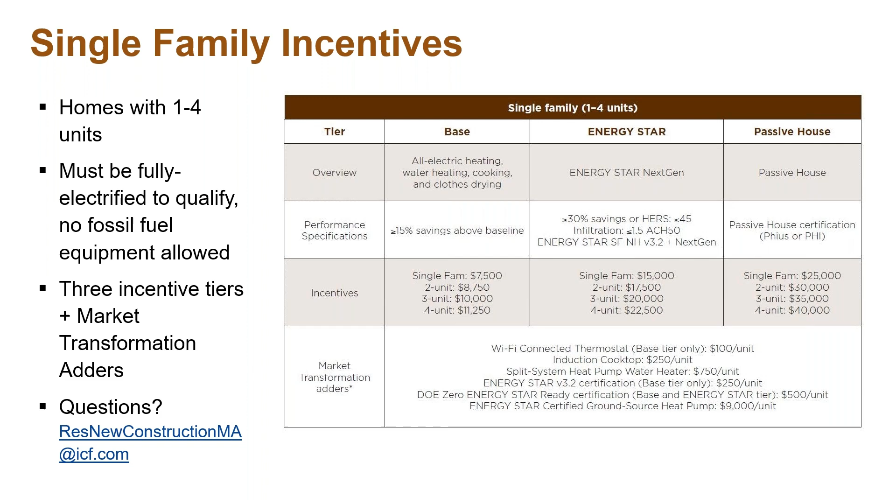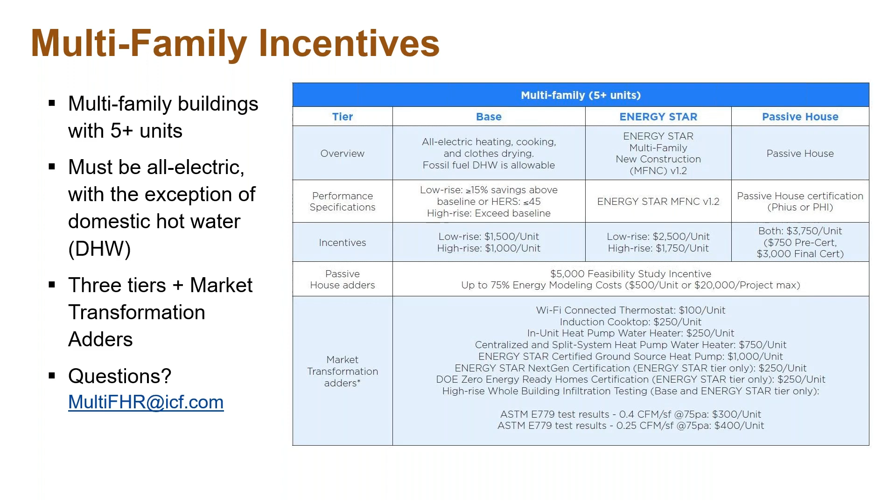How you doing, Keegan? Thanks so much. So good afternoon, everybody. We're going to be talking about the Newton all-electric case study today. Thank you all for joining us.

Our panelists today are Nick Falkoff from Auburndale Builders, Richard Lowe from Kaplan Thompson Architects, and Mike Browne from Advanced Building Analysis. These 3 people were the primary builder, architect, and HERS rater for this project, and we definitely thank them all for their time today and for sharing their experiences on this unique build.

For the case study today, we're going to go through a little bit of everything from inside to outside and everything in between. We're going to end with the key lessons and takeaways before we segue into a brief question and answer period at the end. And just another reminder, there's a Q&A box in GoToMeeting that you can type your questions in, and we'll get to as many as we can at the end.

So let's start from the beginning. I'd like to start with Richard. We're going to set the stage a little bit here about the project. So Richard, can you give us a little bit of the background and the genesis for this project? Yes, thanks, Jamie.

The clients came to us largely, I think, because Kaplan Thompson Architects has a lot of experience with passive house projects—single family, multifamily, and schools. And this site here that they had found had some tremendous opportunities. It's got this fantastic view of the Charles River. The existing house sits on a knoll overlooking the water, and they wanted a low energy, high performance passive house home. So we were delighted to be able to help them with that.

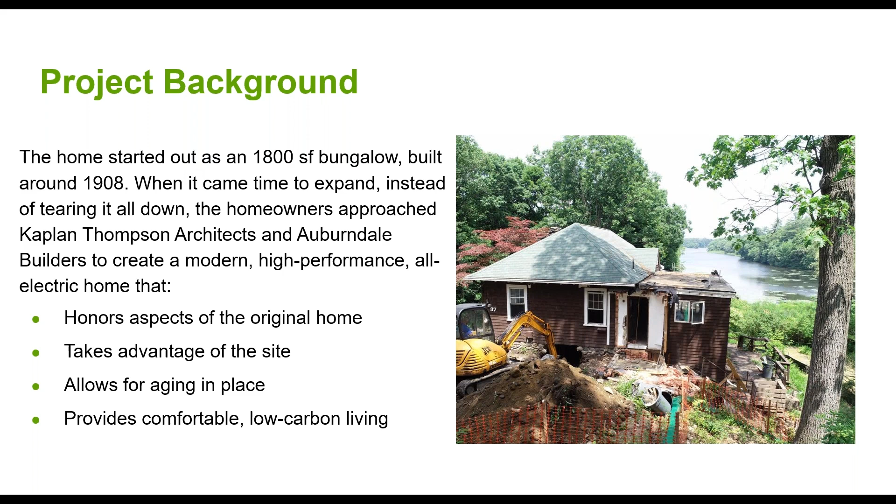On this slide, we have some of the key project attributes. What did the homeowners express to you as being most important when you set out to start construction? Richard had done a lot of work in pre-construction with the clients on the design, and really did a nice job balancing things.

We had to keep the existing chimney and structure. We had the views that the clients were trying to emphasize to the river, and we tried to balance performance with aesthetics—maximizing the views where we wanted them, with trade-offs on how much insulation and how thick the walls could be based on not trying to lose floor space. I think Richard did a really nice job balancing the aesthetics and performance.

The building is super insulated, with the insulation on the exterior of the building, so that doesn't cut into the footprint. We went outside of the old plane of the sheathing from the old house, and air sealed from the outside.

The building has cold climate air source heat pumps that are super energy efficient, so once we had this great envelope, we could heat it all-electric, which we'll get to in more detail. Our team has done a number of passive house projects and net zero projects.

So we just worked with Richard and the clients in terms of phasing the work. You'll see slides of working around the existing structure—it's a sloped site, we're working on the river, and we had to really break things up into a lot of steps. Now that the clients have moved in, we'll be doing a lot of monitoring of the house.

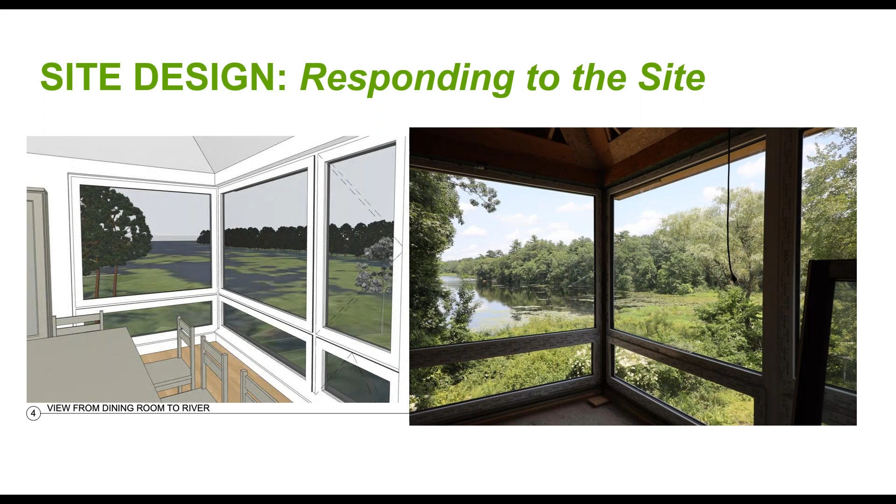The 20-foot drop in the site down to the lowest part of the grade, where there's enough space to put a garage, would make it extremely difficult to provide interior access between the garage and the house. That would also put the new structure on the river side of the existing house, which wasn't possible because of the setbacks given the proximity to the water. There are other setbacks from the road to be mindful of as well. The only place we could put the garage was underground.

Alongside the existing basement, that became the main part of the design, how to accommodate that program. So we now have 2 occupied floors. The living spaces and main bedroom spaces are on the upper floor. Secondary spaces, the mechanical room, street access, entry door, and the garage are all on the lower floor.

That was a big part of the challenge. The views are all to the north and to the east. That's where we put the glazing, because that met the program and the design requirements for the house.

There's a neighboring house to the south of this property, so there are privacy concerns if we put a lot of south-facing glazing there. In addition to that, the property and the neighboring property all have a large number of very tall trees. So even though we might be able to put windows facing south, the shading from the existing trees would limit any solar gain we have there.

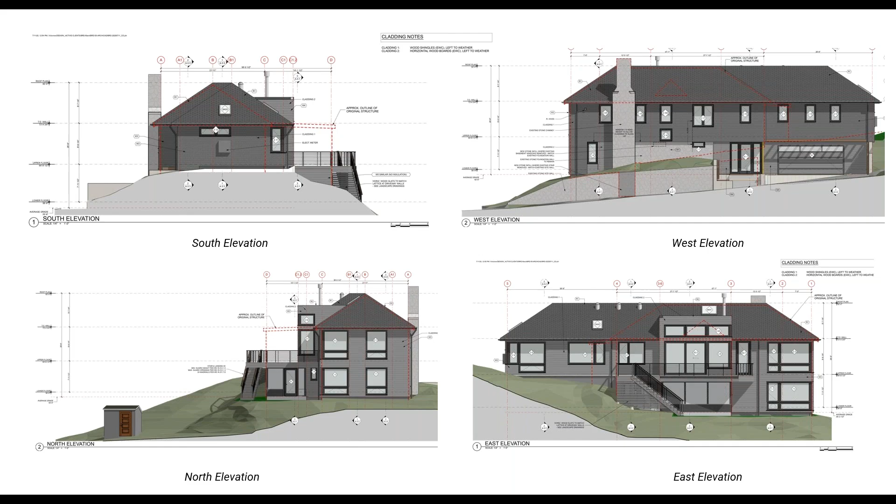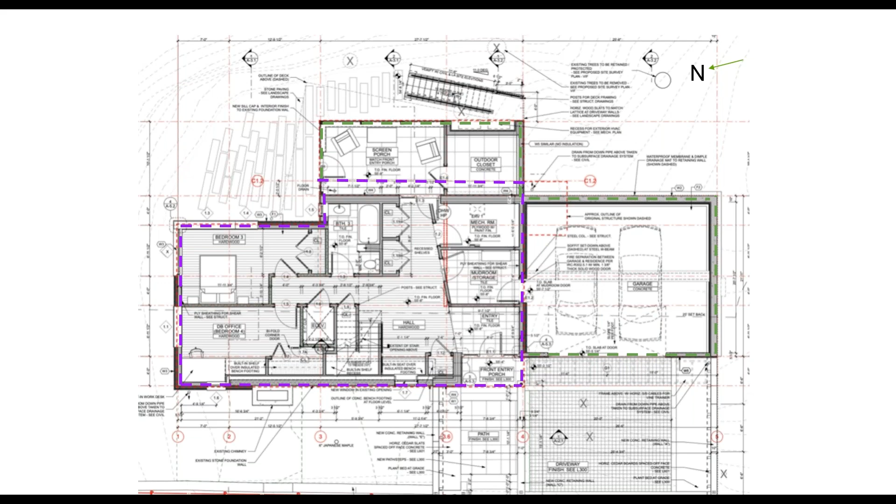On these 2 slides, I'll go through these a little bit from a high level - these are the top-down views of the house. You can see in purple, that's the original home, and this is the lower level here. Anything outlined in green is what was expanded, so you can see the lower floor and the upper floor here. As Richard said, most of the living space is on the upper floors at this point.

Because we removed the 1970s addition, outlined in red, where we placed the exterior deck, the overall footprint of the house towards the water didn't change. We just changed what we put there. The new addition, the garage at the lower floor and spaces on the upper floor, were added away from the river. So we took off some space and we added some space.

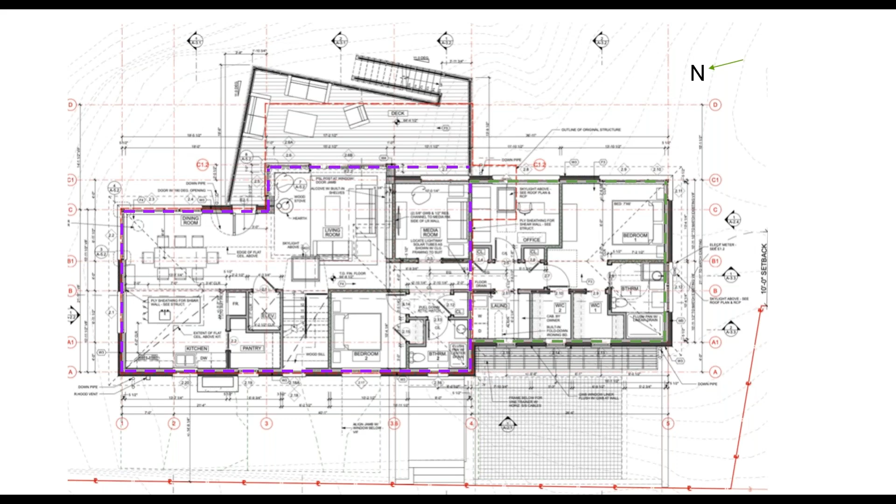Great. Well, thank you very much for that overview. I would love to talk about building envelope, the insulation, and the air sealing strategies used for this house.

I'm going to throw this over to Nick. Would you care to talk about the way this home was insulated and outsulated? Yeah, so has the echo stopped now? I turned down my audio. Yep, sounds good now. Okay, so the way we start with the air sealing and insulation of this building is really at the sub slab.

So starting at the basement, we work our way up. At the bottom of the slide, we have 9 inches of reclaimed EPS. We work with a company called Boston Green Insulation Group, and they take a lot of insulation off commercial buildings, and we reuse that in our building. So we have a 9-inch R36 slab, and over that is covered with Stego.

We'll show you slides of that. That Stego is the beginning of our air barrier. Then when we get to our foundation walls, we've used exterior EPS, and we've got our air barrier that picks up at the beginning of the bottom of the walls. We're taping to our concrete, and we're going up with a zip plywood. And we have

2x6 framing on this job with dense packed cellulose. Outside of our dense packed cellulose walls, we're using 2 inches of reclaimed polyiso and 2-inch zip R, where the polyiso is already fastened to the plywood. It saves a step going around the house, and framers are pretty familiar with it. Then we just tape all that - that's our exterior air barrier.

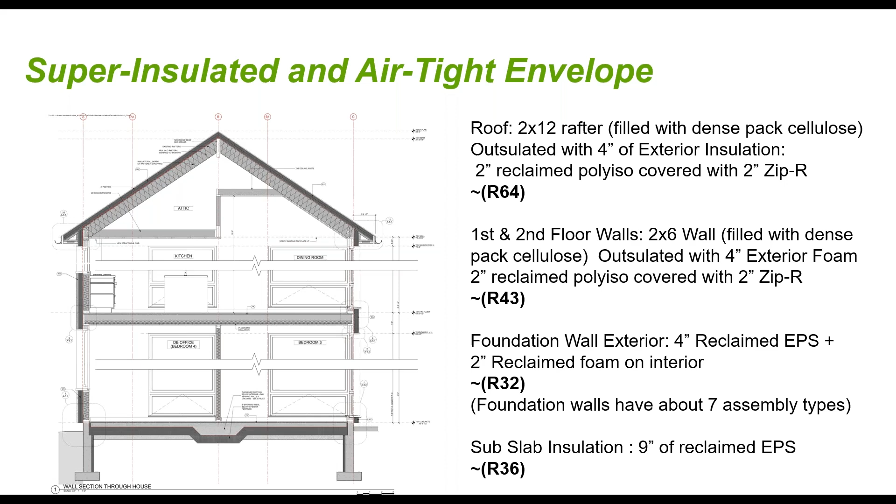And very important, because this house was targeting level 2 for the all-electric offer, this is a continuous layer of insulation across the entire circle of the house, which is fantastic.

So what about the air sealing? I know you had a target at the onset. What was the strategy with air sealing for this house, Nick? So because this was a retrofit and we weren't sure exactly how tight we were going to be able to get it, we had our goal initially set out as 1 air change per hour or less. We actually exceeded that goal.

As we were taking apart the structure, and you'll see slides working under the old structure, we really weren't sure how we were going to air seal around all the old joists or rafters. We gradually took more and more of the building apart.

So we did multiple blower door tests. What we typically do is put up our box — some people call this the Duplo method, some call it the Steve Baczek method, they debate who came up with it. After the initial layer of sheathing goes up and is taped, we test the building then. We have Jason Taylor come out and run a test for us. Then once we cut our windows in, we test again.

The importance of testing multiple times is you want to catch your leaks as you're going. You don't want to wait till the end and say, oh boy, we missed a leak, and you don't know if it's your sheathing, your windows, or a soffit. Even after multiple tests — windows in, and then testing again after insulation was in — we still weren't hitting our number.

So we decided to use AeroBarrier on this project after we drywalled, after blueboard and plaster, because we really wanted to exceed our number and were having trouble chasing small leaks. What we've run into on previous retrofits is once you get down to a certain level of air tightness, it's hard to pick up 3 or 5 CFM leaks with an infrared camera or a fog machine. The aero barrier allows us to really guarantee we're going to hit our air tightness number without a ton of labor.

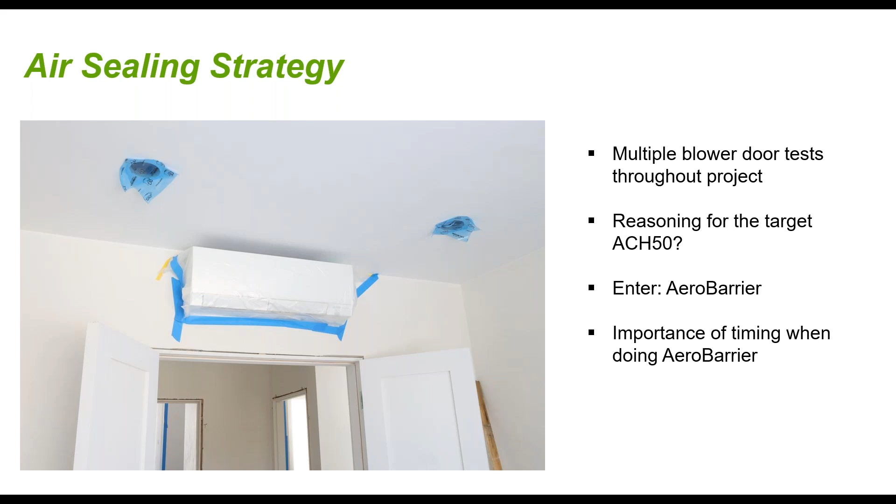I think the next slide here shows that it was very much a success. We achieved 302 CFM 50, which is 0.57 ACH 50, 0.043 CFM 50 per square foot, down from about 600 CFM to about 370 before the aero barrier process, which took, as you can see in this graph, about an hour and 45 minutes to do for the whole thing — which is fantastic.

Mike, I want to ask you real quick, for context, what does a traditional standard house have to be built to for air changes per hour, and where does this one fall relative to that? Sure — current code is 3 air changes per hour at 50 pascals. Here we're at 0.57, so this is 5 times tighter than current code requires for the air tightness test.

It's also just beneath the 0.6 ACH 50 that Passive House used to use as their limit. Passive House has moved to a number normalized by surface area, which is why you see the last metric there, and the new limit for Passive House is actually 0.06 — this came in at 0.043. So this was a fantastic result, and it's obvious to me a lot of attention was put into the air sealing throughout the process. It's incredibly impressive that it got even tighter after the aero barrier, with remaining things Nick must have still found afterward.

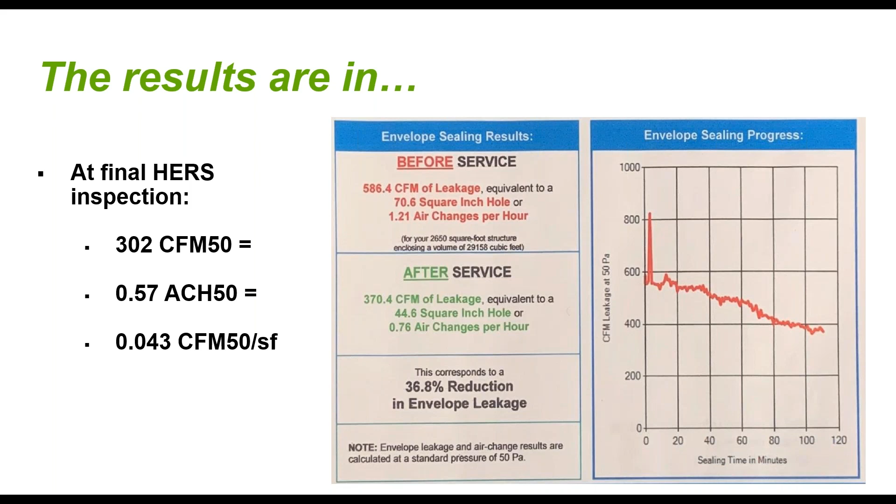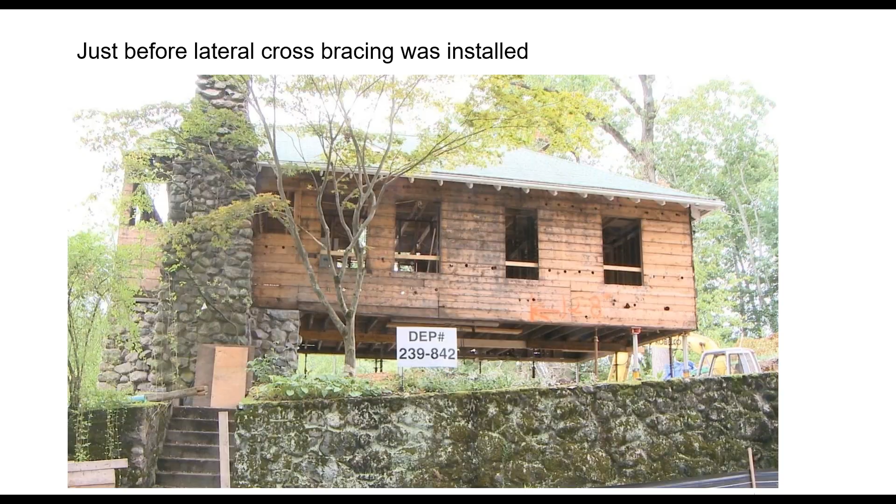There's a pretty cool follow-up shot here. Ready? Check this out. This is the house on piers, basically. Yeah, that's right. That's the existing house with the cladding and the windows removed. Everything that we didn't want to keep, that's gone.

What's left? So I know there's a lot to talk about with the foundation here. Nick, can you speak a little bit to the underpinnings and what we're looking at here? Yeah, so as you saw in the previous slide, we had to pick up the house and brace it from below. One of the historic characteristics that the city and the owners wanted to preserve was this fieldstone foundation, fieldstone chimney.

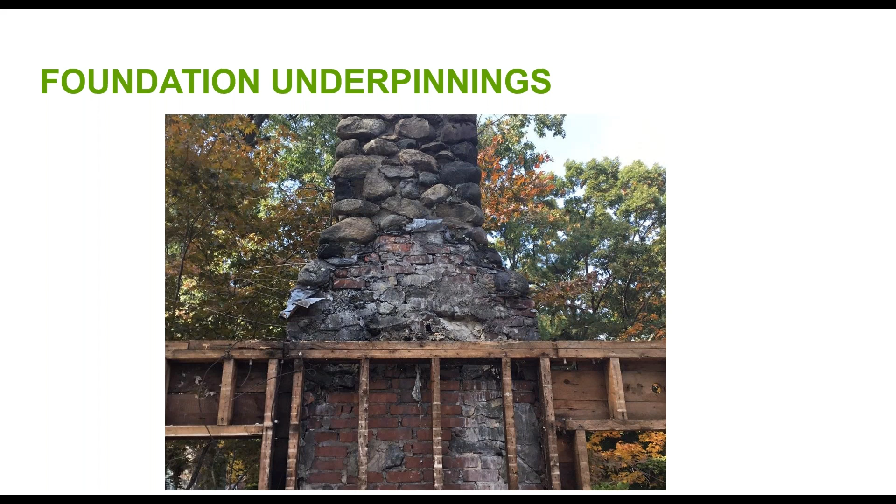This chimney, we actually ended up having to underpin underneath of it and brace it. The walls around it were really not doing well. So you can see in this photo that we poured a new wall leading into that chimney to brace off of and stabilize it.

Bob Franchi, who did the site work here, did about 8 different concrete pours. We'd brace, we'd form, and then they'd pour, then brace and form and pour again. We really couldn't do this all in like 3 or 4 pours like a typical project. We had to sequence it, and it was a process, but we were able to preserve the chimney, and it's in great shape, no cracks, better shape than it was. The aero barrier sealed right around it, which was great.

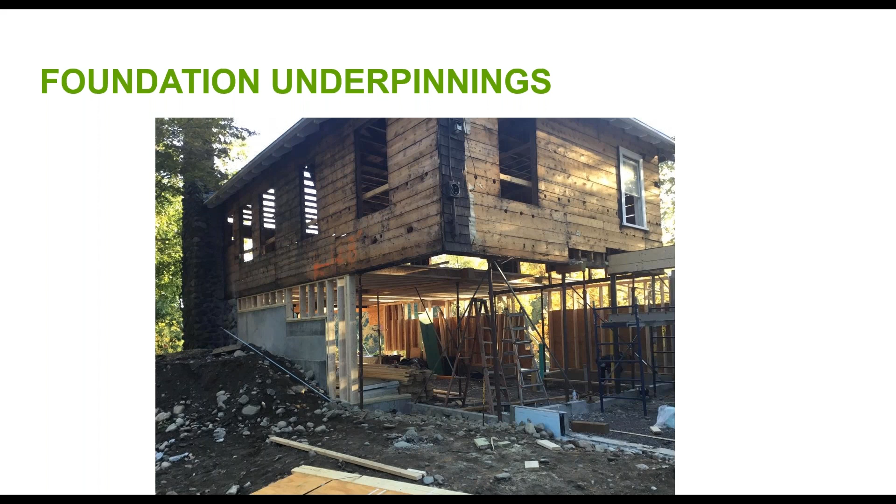Makes it look like it was always there. Exactly. So we have a picture coming up here of the detailing at the wall base at the window. Nick or Richard, would either one of you like to comment on this detailing?

I'll jump in and talk first about the window location, the framing, and the outsulation, all shown in this detail. The windows, we'll talk about in more detail later, but these are triple glazed units. Some of the larger windows are quite heavy, so locating them in line of the existing framing means they have support.

So that makes a lot of sense. And then we've got the issue of continuous insulation on the outside. Our windows appear in the middle of the finished wall, which gives it a contemporary look, a deep shadow line, which is nice. This particular image doesn't show all the way down to the subfloor, correct?

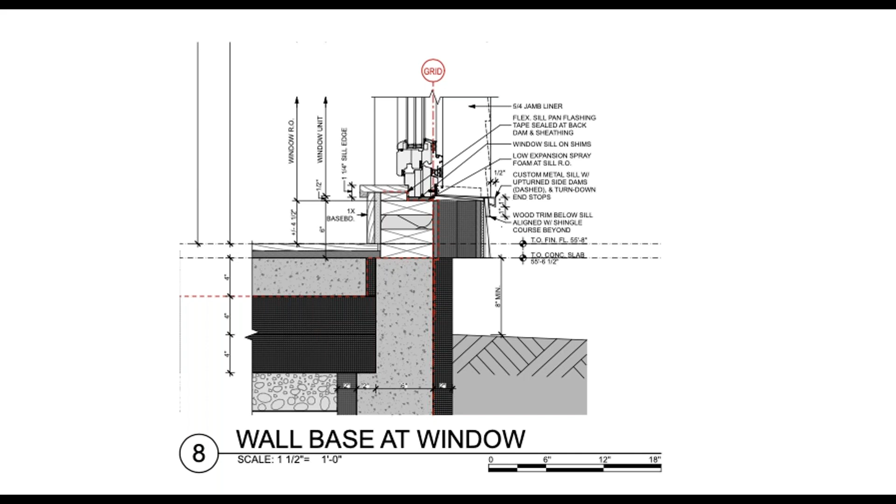Not down to the footing. That's the concrete slab on the lower floor. Yeah, and there's 9 inches of reclaimed insulation. There's a narrow thermal break between the slab and the edge, and we've got exterior foundation wall insulation down to the footings.

So this is the stego stuff you were talking about, Nick. Can you describe that a bit more? Yeah, typically in construction you'll see like 5 mil or 6 mil polyethylene sheeting, people pour their concrete on top of it. A lot of times the site contractors like to go through and punch holes in the poly so the water from the concrete will drain through. So in this site, what you're seeing is the EPS, and there's some thickened footings, thickened slabs in the middle, that recess there in the floor.

That's where we're putting our interior bearing walls. We like the stego because it's really durable, like a 15 mil. It's a little hard to form your corners, but once you get used to it, you just have to remind the site guys that when the concrete is wet, they can't punch holes because that's our air barrier below our slab. It's also key that wherever that slab meets the wall, we've got a 1.5 inch minimum thermal break. Basically, we don't want the outside wall touching our inside slab.

We want that totally thermally broken, because otherwise that slab will get cold around the edges, and it's a place where moisture can condense. So we bring that stego up the walls, and then we tape that to our walls, and then the drywall going over that and the trim will seal that to the wall.

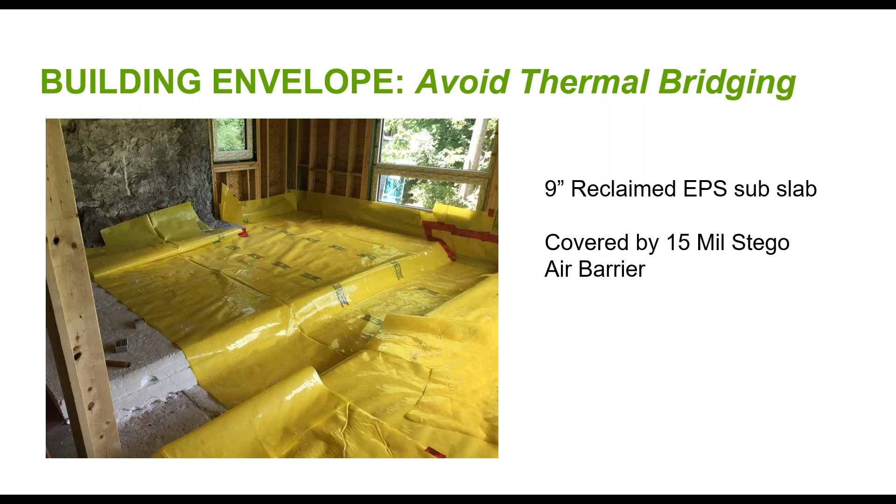That's really neat. I'm glad you were able to share this image with us. And one of the things we've been talking about a lot is this reclaimed insulation. I can see some of it up here. How does that affect the project, and why did you choose to go that way?

So we try to work with materials that most framers are already familiar with. If you're new to this, most framers are used to seeing plywood, zip plywood. And if you give them a plywood with an insulation that's already attached to it, which is the zip R, it's not that complicated for them. It's just a little different. And so we like the reclaim.

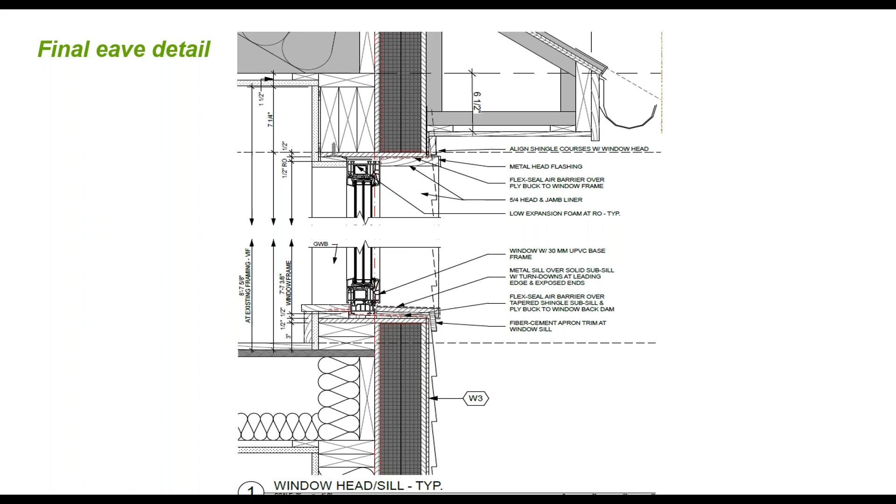Richard had an initial design where the continuous insulation overhung the eaves, but it wasn't really doing us any good. We'd had this detail in another project before, and that exterior insulation out over the eaves isn't really serving any insulating purpose. So we worked with Richard and said, hey, can we just frame that out? We pre-frame those soffits on the ground and then bolt them on. This allows us to have the structure of the soffit tied directly to the plywood going up, tying that soffit back to the main roof. So the plywood is continuous on our overhangs, and it reduces the amount of foam we needed on the job.

And this was the same detail, whether it was an attic, flat, or a cathedral, correct? Correct, yeah. Very good, very good.

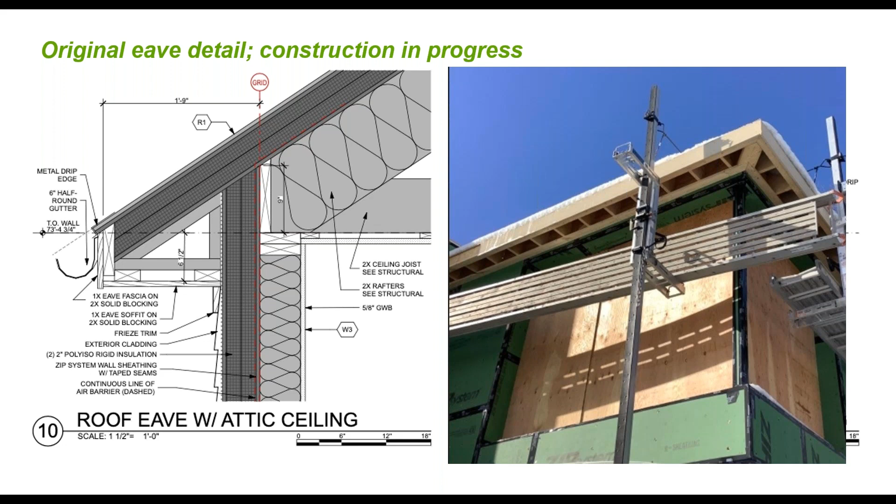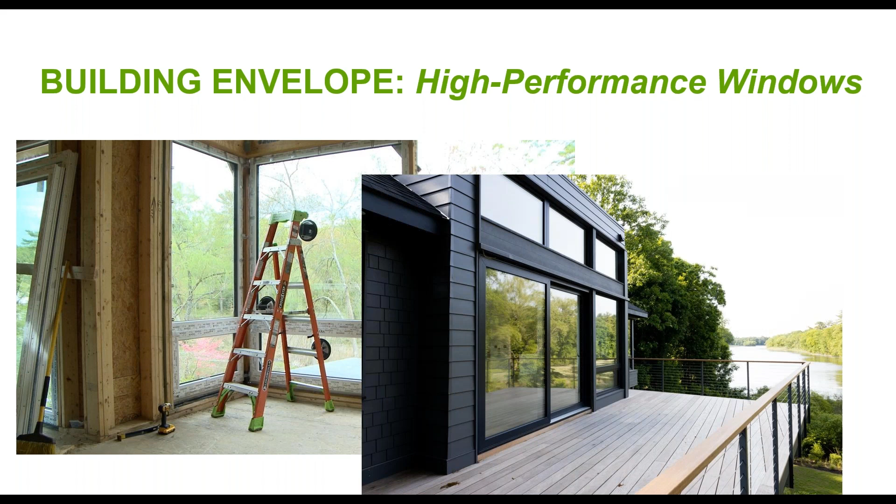Richard really wanted very clean lines on the inside, so a lot of the detailing is to try to minimize the lines to emphasize the view. These windows don't have nailing fins, which you'll see on some other slides. Instead they have clips that we install from the inside, setting that window into the window buck, and doing some taping. We're taping the windows and then the sills before we set it in. So we use zip stretch tape at our sills, and we set that on top of a clapboard - it's a little bit different installation.

You need to have more people to move these windows because they're heavier, so it adds some cost. But one of the big differences I tell people is you can put your hand on the glass of these triple glazed windows in the middle of the winter, and it doesn't feel cold. People are so used to these big expanses of glass feeling cold or drafty. But if you tape them properly, there's no draft, and since it's triple insulated, it's very comfortable right next to the glazing. Most people are not used to that.

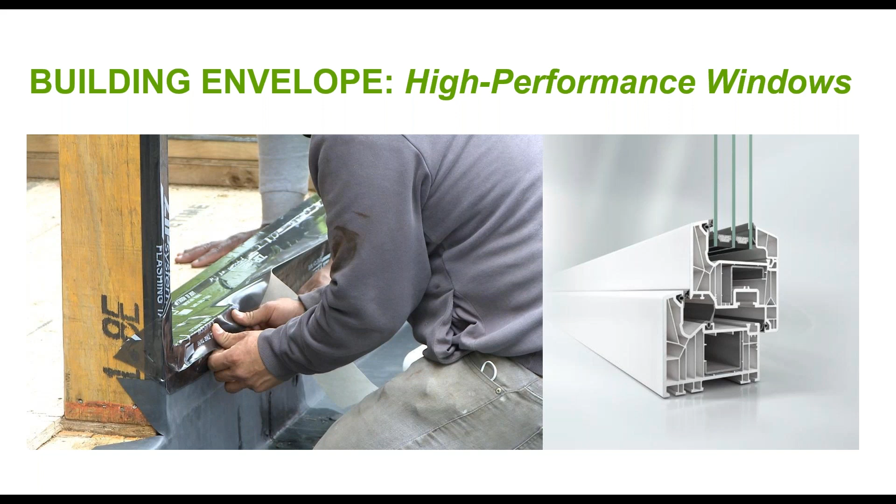I'll turn it back to you, Richard. Yeah, the whole subject of windows was a long discussion with the clients, and we reviewed a number of options with them through EAS, who are great. The windows that we ended up with, you can see the profile there. Other options we looked at were wood windows and aluminum clad windows with lovely finishes, but they're more expensive. We ended up with this version of the windows, which seemed like an excellent balance between performance and cost.

And I know, Mike, you wanted to talk a little bit about the glazing values here. You were talking to me earlier today about European windows versus American windows and the sticker here. What can you tell us about that?

Sure. What we're looking at here is one of two labels that show us the numbers we use in HERS ratings. We use an overall U factor that combines the frame and the glazing, and an overall solar heat gain coefficient that combines the opaque and glazing areas. That's what goes into a HERS rating. It's a little different from what goes into a passive house rating. In a passive house rating, the consultant can enter a U value of the glass and a U value of the frame, along with the relative areas of the glazing and the frame, and the passive house software will calculate this overall number under the hood. You can go through the software and pick it out for each window, but on this project there were between 40 and 50 windows, and it's actually quite a bit of work to calculate this for each one.

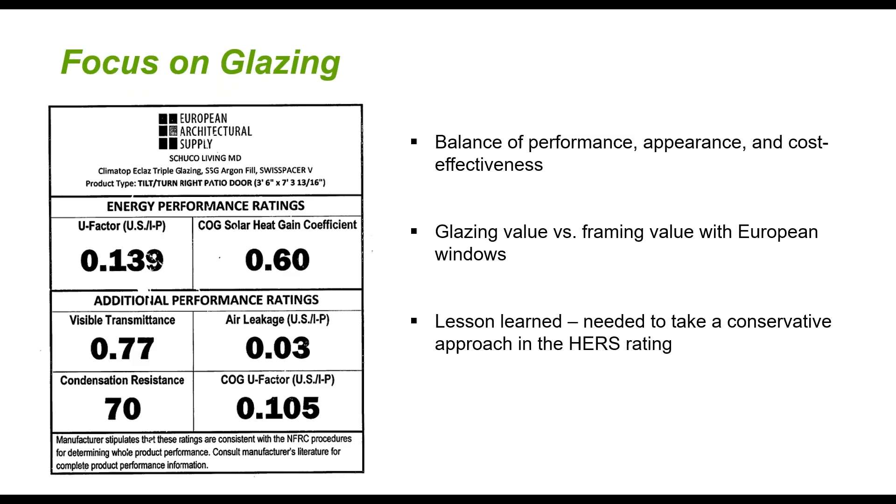Well, appreciate the insights on that, Mike. Want to talk a little bit about mechanical systems in this house, and what was selected. Nick, you want to speak a little bit about the process for selecting the equipment?

Our advice is always to use your HERS rater's energy load, your heating and cooling load calculated with the insulation levels and air tightness you're actually building with, and the window values for that matter. You'll very likely end up with smaller, more properly sized equipment. It's so important to size cold climate air source heat pumps properly so that they meet the load at the coldest temperature, but don't short cycle a lot either.

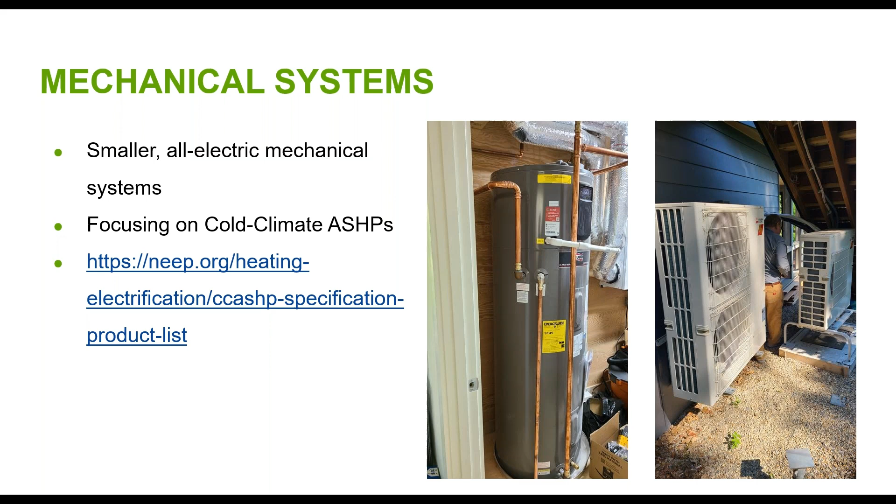I'll just remind the audience, anybody doing the Mass Save all-electric offer, there is a heat pump qualified product list that Mass Save operates, which is related to but not exactly the same as the NEEP list. So make sure you're double checking that if you're selecting equipment. I think the NEEP list just has the best data to describe it - yeah, it does have great sizing data.

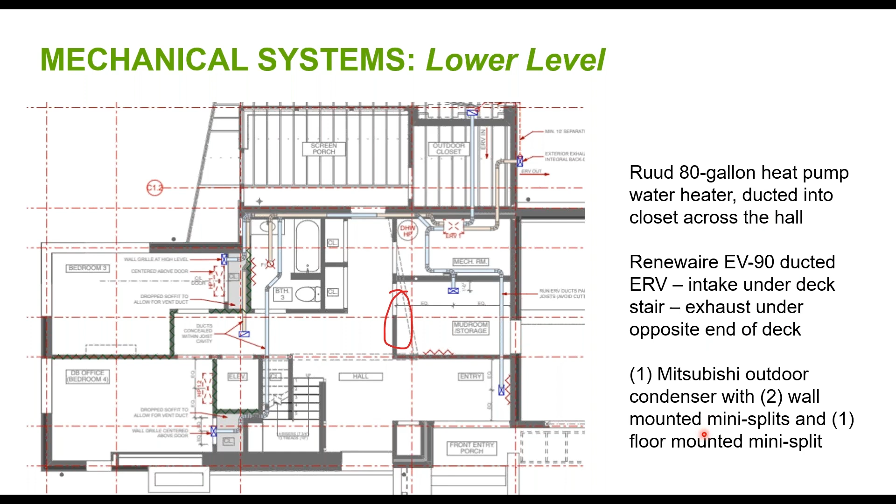So just a real quick overview: we have an 80-gallon heat pump water heater. You have an ERV on the lower floor, 1 Mitsubishi condenser with 2 wall mounts and a floor mount, which is this one here. On the upper level, you have another larger ERV, and 2 condensers with some ducted and ductless mini splits.

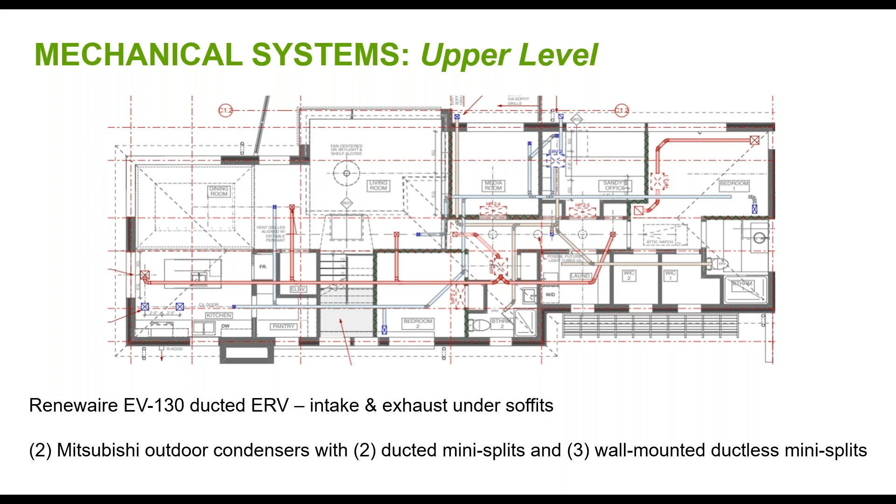Very important with this house - we're going to talk right now about ventilation. So we talked about the ERVs. I would love to talk a little bit about how a ducted ERV helps maintain the balance of ventilation in the home, keeping in mind we have about a minute to talk about this. Mike, I'll throw it to you.

Air quality is so important in a tight building. We need to have healthy changes of air for the people living inside. The ventilation rates depend on how many people are expected to be living there and the floor area, which is a proxy for occupancy. It's really important to distribute this air to all parts of the home where people spend time. This is nicely done here with 2 different ERVs, one from an attic space and another from a mechanical room on the lower level. We go through and verify the flow rates after they've been set up and balanced by the installers, and this was working very well.

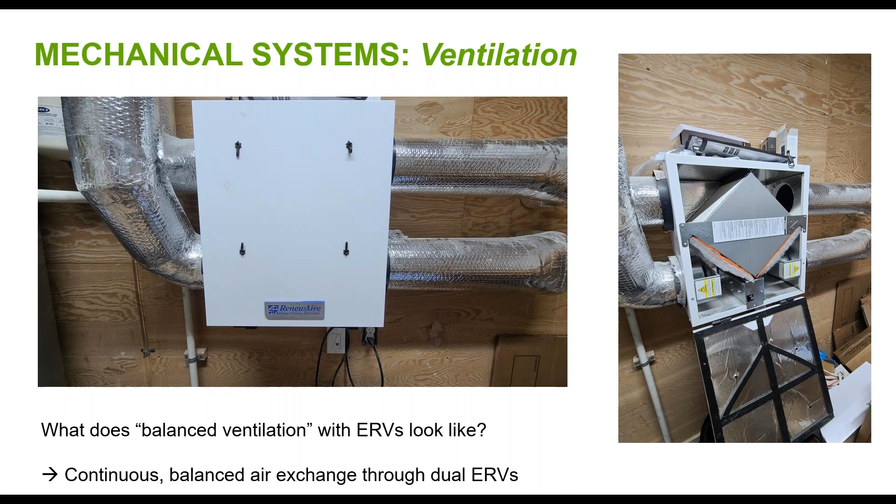This type of ventilation will be exhausting pollutants and putting fresh air into all the living spaces. So the focus on indoor air quality is very strong with a house like this. I appreciate that for sure.

Mike, I'm going to put you on the spot again real quick. Talk a little bit more about the role of the HERS rater in general, and then in this project. We know you came in towards the tail end of this project as opposed to when a HERS rater might typically get involved. Tell me a real quick overview about what changed in this project.

Happy to talk about it. So for typical new construction, HERS raters are involved from the time of design through to occupancy. The energy modeling that we do based upon the design is used to pull a permit. We can help influence the design at this time, and help people optimize their investment in all the different types of energy efficient features that go into a home, optimizing for whatever performance goals they may have.

Throughout construction, we try to make sure things happen as planned. Rough inspections are important for looking at the insulation and making sure it's working together with air sealing details, and looking ahead to ventilation and plumbing concerns. The final inspections will have final testing of air tightness, duct leakage, ventilation airflows, and verification of all the installed features, being mechanicals, appliances, lighting, and renewables if there are any. That all goes into a final updated energy model, which is used to get an occupancy permit.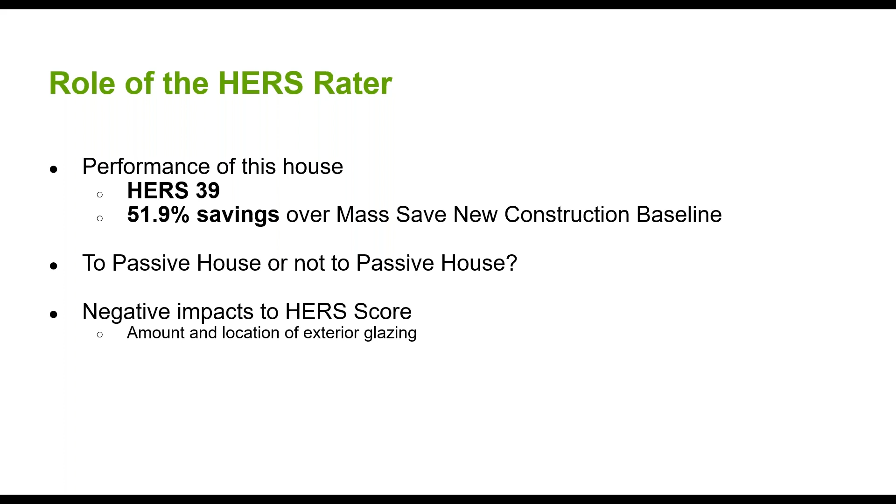I want to get to the one question I know that most people in the audience are probably thinking about: how much does this cost? So let's take a couple minutes here.

One of the main takeaways from the first webinar we had on the Acton house was that there were a lot of questions about whether a passive house or an all-electric home is going to break the bank when it comes to constructing it. We know this was a custom build, and we know it was done pretty much all during COVID. But Nick, can you speak to these first numbers here and how this compared to a more traditional custom build?

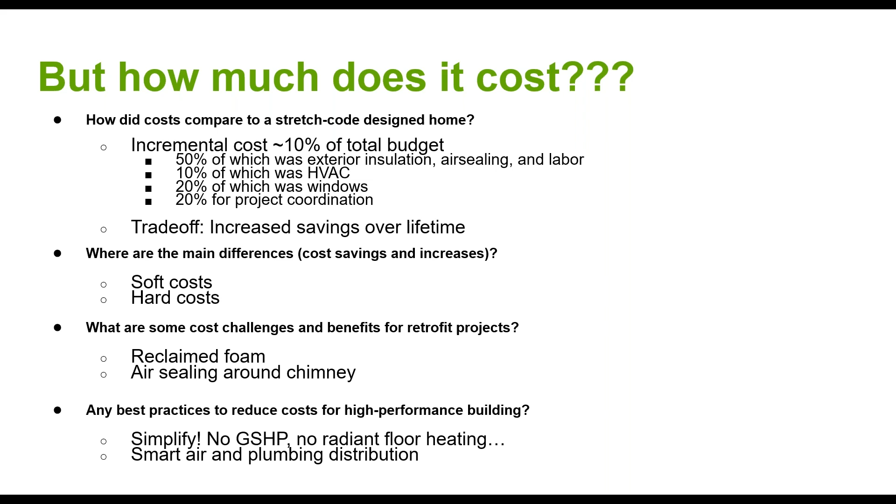As far as lessons learned from this particular project, you've summarized quite a few things already, but if anybody else is considering a project like this, taking an older home and bringing it up to really high standards with almost passive house design thresholds, what do you think? What suggestions would you have for starting that process, and what are the best practices? You want to start, Nick?

Yeah, I think something we really try to emphasize upfront is, a lot of people, if they haven't done high performance before, their first time through, I always tell people you want at least one person on the team that has experience. Whether that's your HERS rater, your architect, the builder, or even the client. Somebody on the core of the team has to have experience, so they know what dials they can turn and what impacts.

So if you're going to do this for the first time, try to make sure you have somebody, and sometimes you just have to bring in a consultant. You might not need Mike Browne because it's a renovation, but you might want to hire him anyway because he's got experience and can guide people. So one of the keys is experience, and then talking through the options, like when evaluating window options, going with people who have experience. If you haven't got experience, you can hire a consultant to help, and it's money well spent. You're really getting your education in high performance.